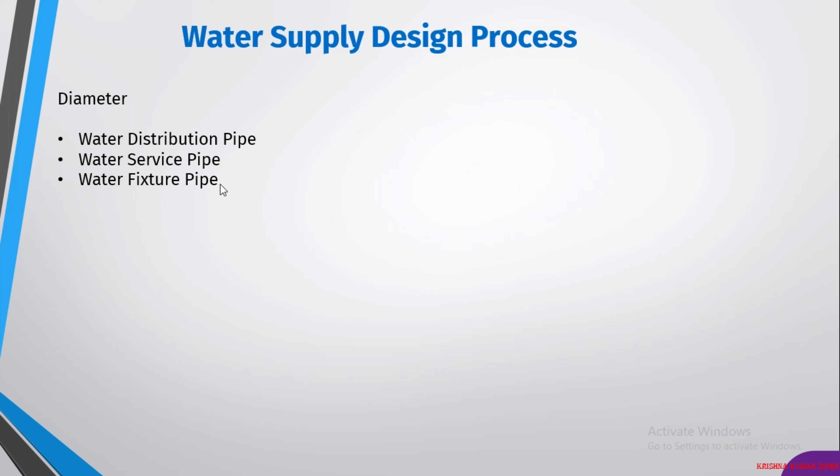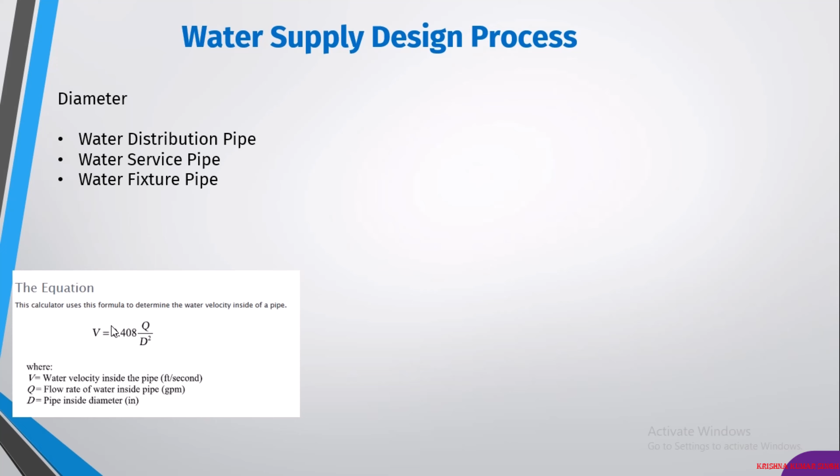Let's look over here. Our purpose is to design the plumbing system by calculating the pipe size or diameter. To find the pipe size, you already know from this equation that you require Q and velocity. The input for calculating the pipe size has two inputs: number one is water demand, also called Q, with units in GPM, and number two is velocity.

Now the second question is how you calculate water demand. You can calculate water demand by measuring the water supply fixture units. You cannot calculate GPM directly, or take the values of GPM from the International Plumbing Code. First, you must know the water supply fixture units of the entire building, then you can convert water supply fixture units into water demand or GPM. So this is the first method for measuring your first input.

Now for velocity, you must consult ASPE handbooks, American Society of Plumbing Engineers handbooks. The handbooks provide you the values for the velocities. If you use copper pipe, the velocity value is different. If you want to use plastic pipe, PPR pipe, then the velocity values are different. You can get these values from these handbooks, and normally these velocity values represent good engineering practice.

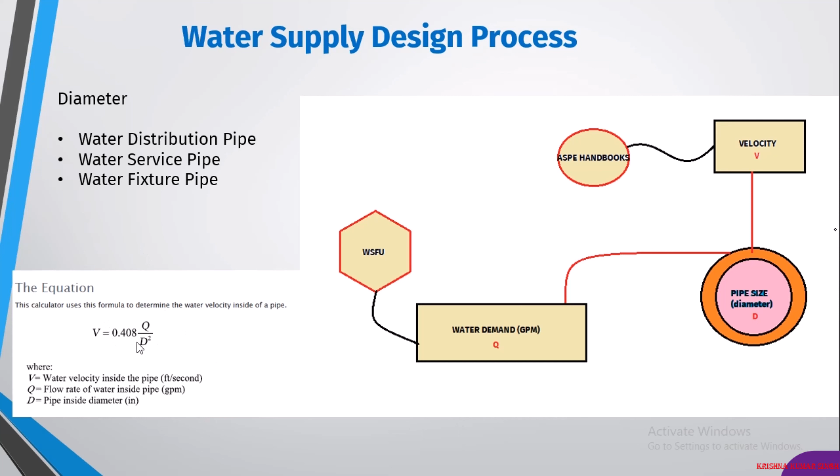Now let's discuss estimating water demand, or in other words, estimating the GPMs - how much gallons per minute are required for a residential house, a villa, or a high-rise building.

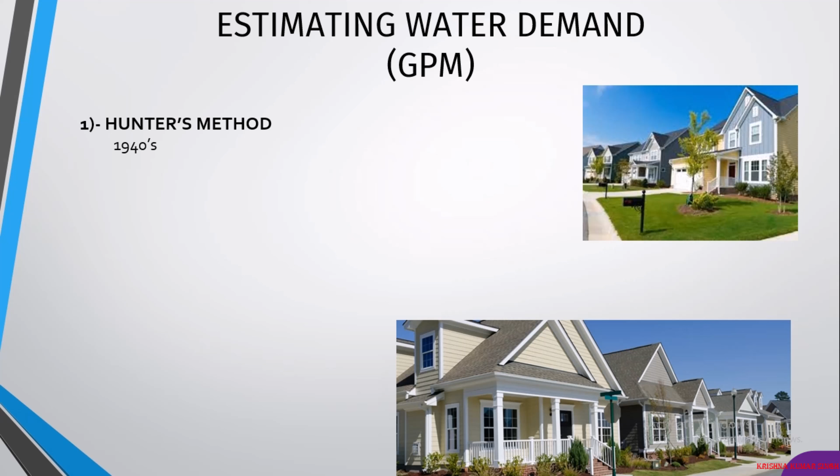To calculate the amount of water required in a building, we have a widely acceptable method called Hunter's method. It was proposed by Dr. Hunter in the 1940s, and is widely used by most companies and adopted by different international standards like International Plumbing Code, Uniform Plumbing Code, and ASHRAE handbooks. There is another method proposed by the American Water Works Association in the early 1970s, but that method is not used by different designers. Most people rely on Hunter's method because it is widely acceptable and adopted by different international standards. So my course focuses on this method.

I will teach you Hunter's method to calculate the water demand, and we follow this method to design our plumbing system.

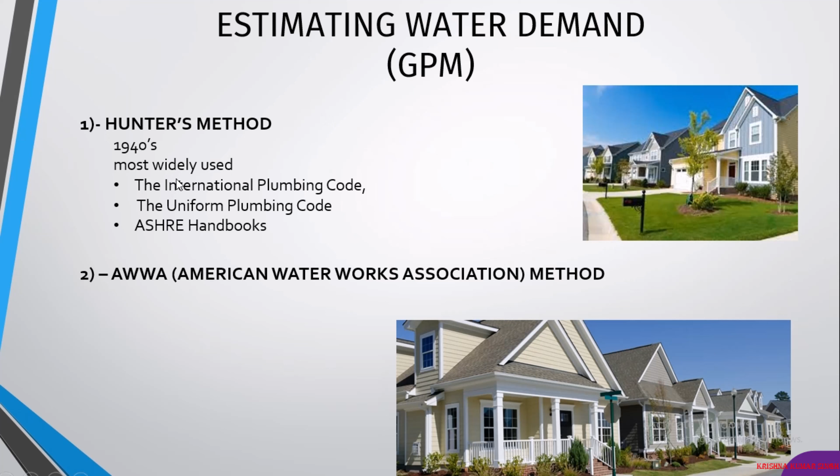So guys, in this video we will estimate the water demand, in easy words, the GPMs of a residential cold water system.

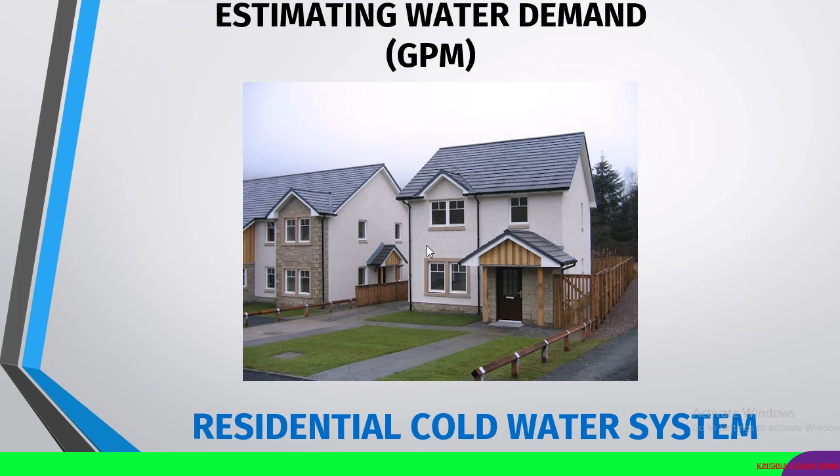Here we have a sample project, or you can say a sample example of a residential house. In this house, we have a ground floor and a first floor.

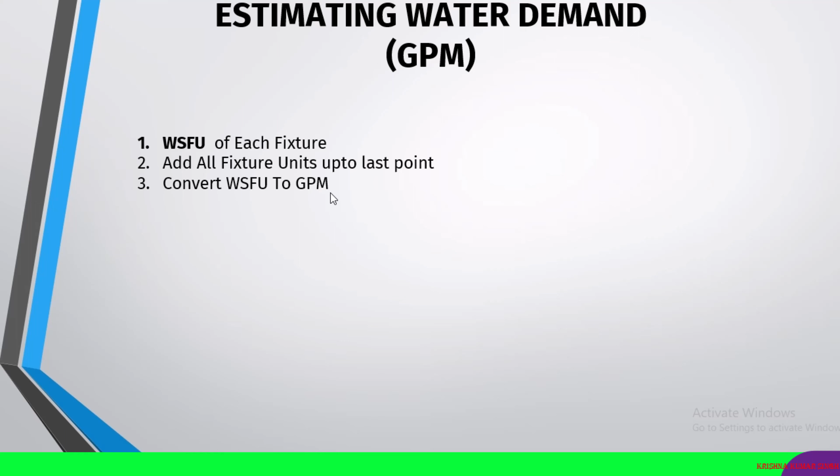The first step is calculation of water supply fixture unit. We will add all the water supply fixture units. After addition, we will convert the WSFU to GPM. In the upcoming video, I will elaborate on this to avoid further confusion, and we will solve and calculate the diameter of these pipes. Alright, see you in the next video.

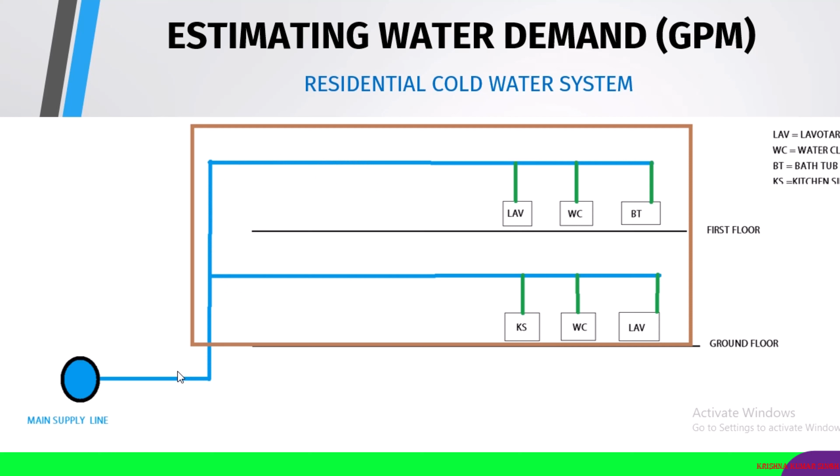Now let's discuss water supply fixture units. Prior to sizing a domestic water system and determining pipe sizes, it is important to understand the concept of fixture units.

Water supply fixture units, WSFU, is the standard method for estimating water demand for a building or residential facility. This system assigns an arbitrary value called WSFU to each fixture, whether it's a water closet, lavatory, kitchen sink, or any plumbing fixture. We assign a value to each fixture based on the amount of water required and the frequency of use.

Let's learn with the help of an example. A WSFU of a water closet in a private project, like a residential house, has a value of 2.2. These values are taken from IPC, International Plumbing Code - I will show you the table from where I got this value. A water closet is assigned a WSFU of 2.2, while a sink or lavatory is assigned 0.7 fixture units, FU. These values are based on the International Plumbing Code.

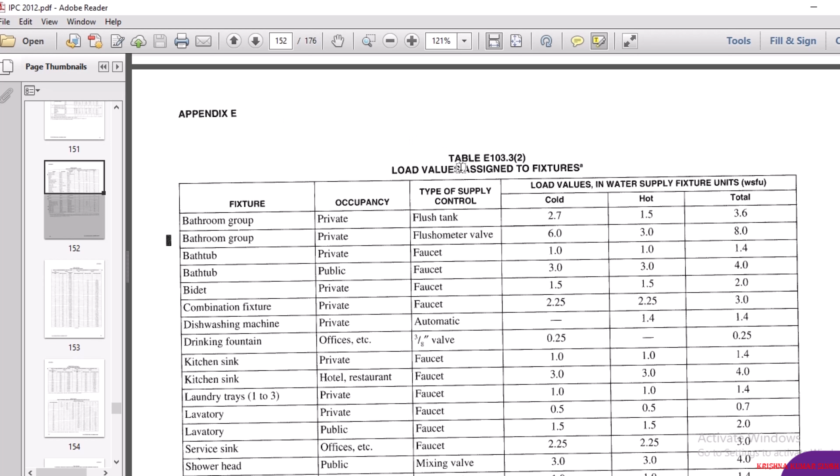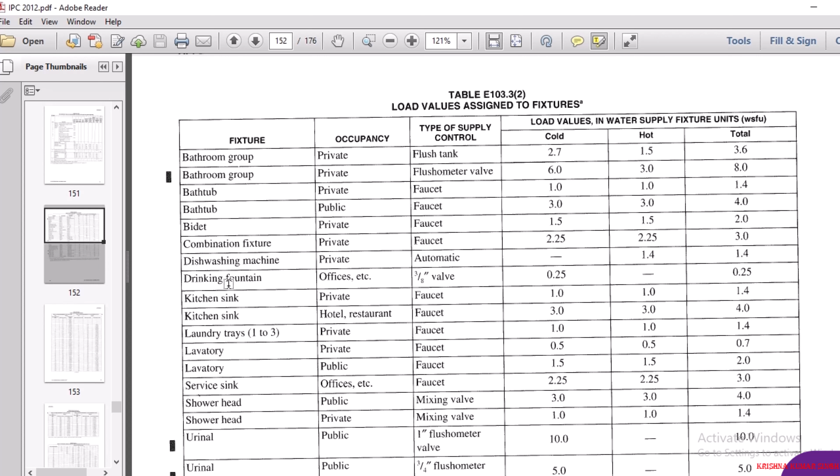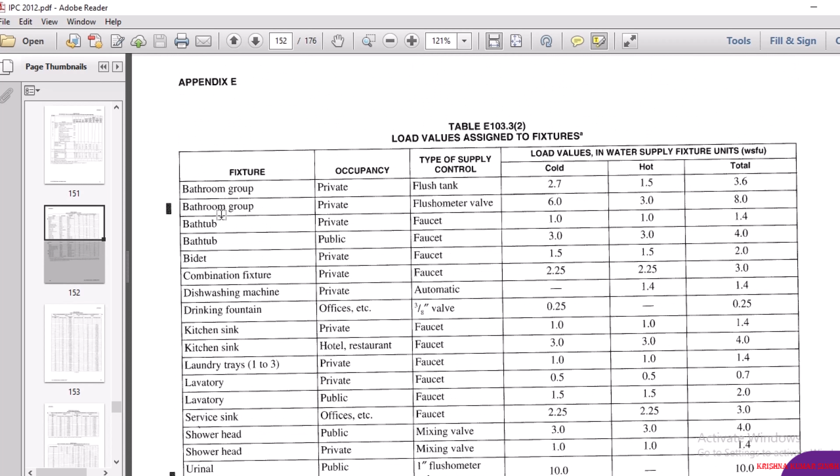Let me show you: page number 152, Appendix E, table number E103.3(2). In this table, there is a list of fixtures required in a plumbing system: bathroom group, bathtub, bidet, kitchen sink, drinking fountain, urinals, washing machines (three types), water closets, public and private. We further classify the occupancy into two categories: private, office, or public.

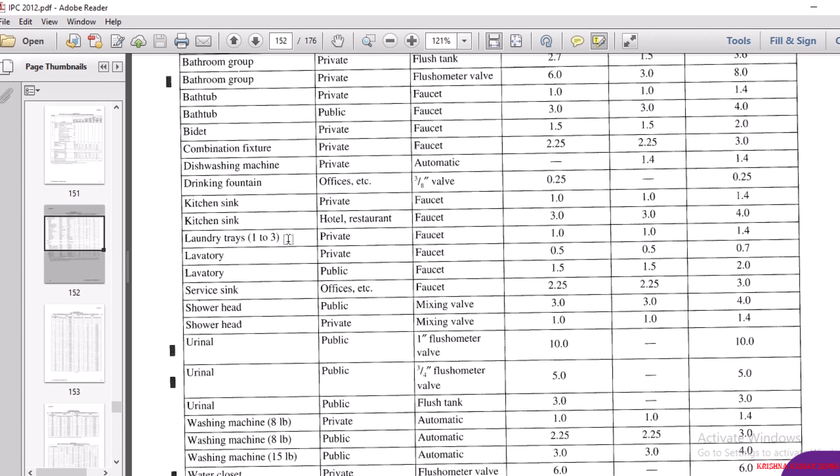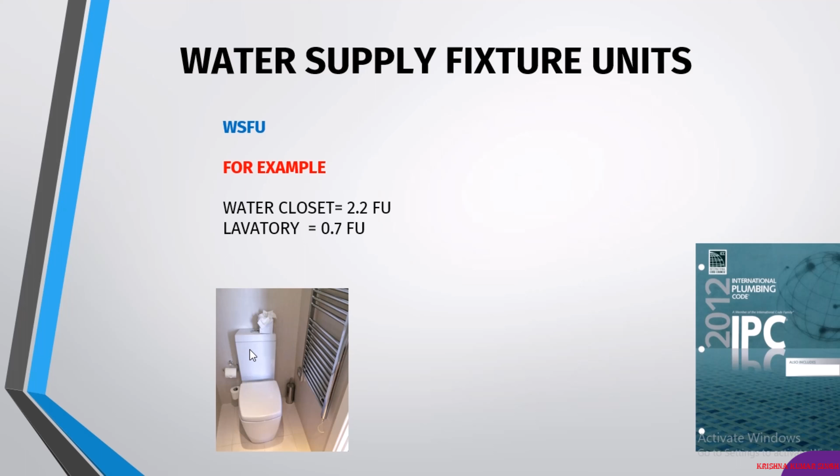So in our example, we have taken water closet 2.2. This is water closet, private. In private, we have two options: flushometer valve or flush tank. It means there is a simple water closet with a flush tank, 2.2 value. Normally in our residential houses we use tank type water closet.

I will tell you the difference between the water closet with flush tank and flushometer valve in the next video, but just in this video focus on the data extraction from this table. So the water closet with private flush tank value is 2.2 here. Cold water value is 2.2. Everybody knows the water closet only requires cold water in most cases. We don't require hot water unless you live in a very cold area.

So the lavatory is 0.7 fixture unit. How do we get this? This is the lavatory, public or private. We are dealing with private. It means this is lavatory, private, 0.5 fixture units. Water supply fixture unit, WSFU 0.5, and 0.5 hot water. So in this case, let's suppose my client does not want to install hot water facility. So I'm only interested in calculating the cold water value 0.5. So this is how you will get the values of WSFU.

Don't get confused. I will solve the sample project that I already showed you in my previous video. I'm just telling you how to get the values of fixture units.

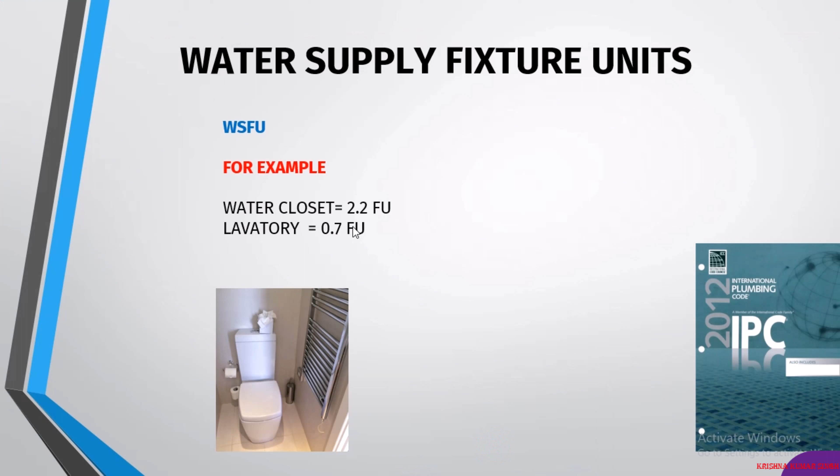Now coming back, 0.7 fixture unit. So the difference in fixture unit is basically due to the fact that a toilet requires more water than a sink, right? This requires more water than a sink. So therefore it has a higher fixture unit value.

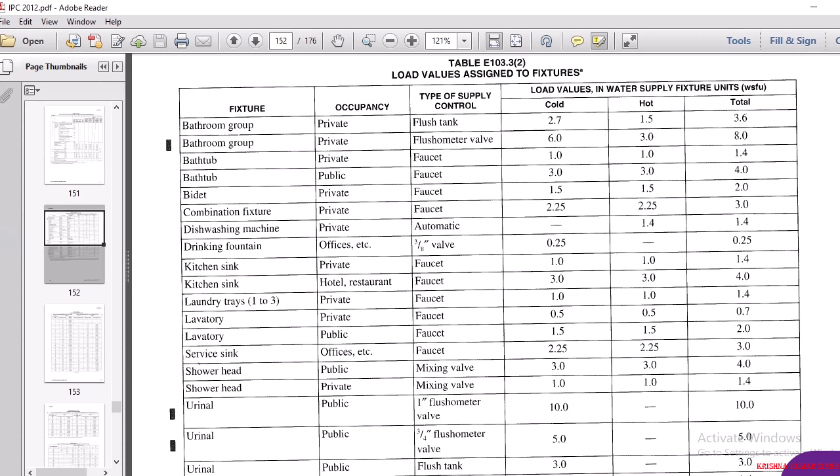Now let's have another example. We have a public water closet. That was residential. Let's suppose we have an airport or a shopping mall and we have installed a water closet, tank type water closet. In this case, we have 5.0 fixture value. Let me show you with the help of water closet, public flush tank 5.0.

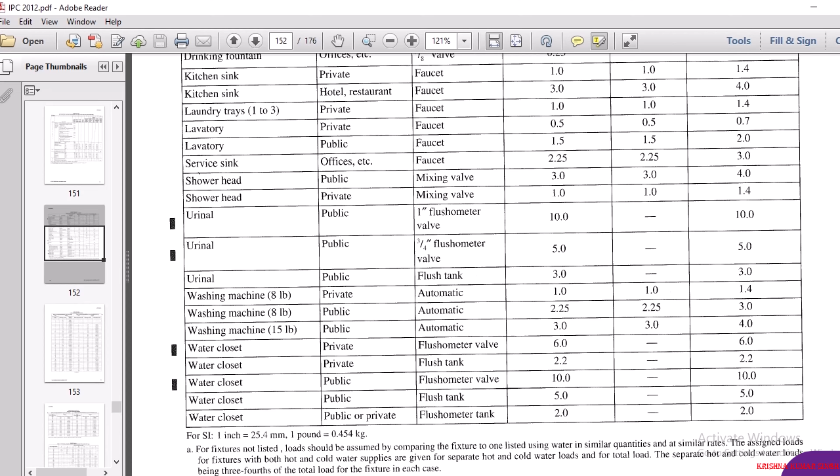So why is there a difference in fixture unit value? It has the same tank, everything is the same. A public water closet has water supply fixture unit value of 5.0, even though the water closet is the same as the private water closet and the same amount of water is required. So we can say that a public water closet has a higher usage frequency, which increases the WSFU value.

Okay, so that was a brief introduction about water supply fixture unit. We will use this study during our design. So in the next video I will teach you about the difference between flushometer valve and flush tank, and then we proceed with the sample example that I already showed you in my previous video.

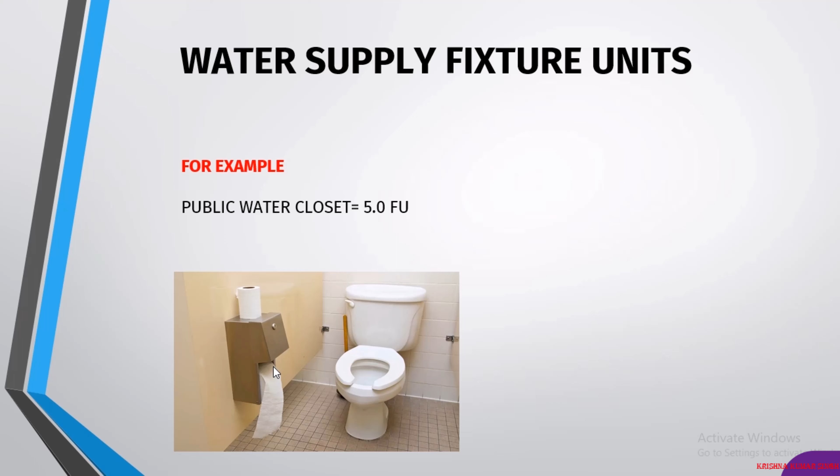So now we will study about flush tank versus flush valve water closets. Let's discuss the flush tank water closet. A tank type water closet normally uses the tank fluid elevation to forcefully flush the water closet waste through the waste system, and after the tank is flushed, it uses a fill line to refill the flush tank.

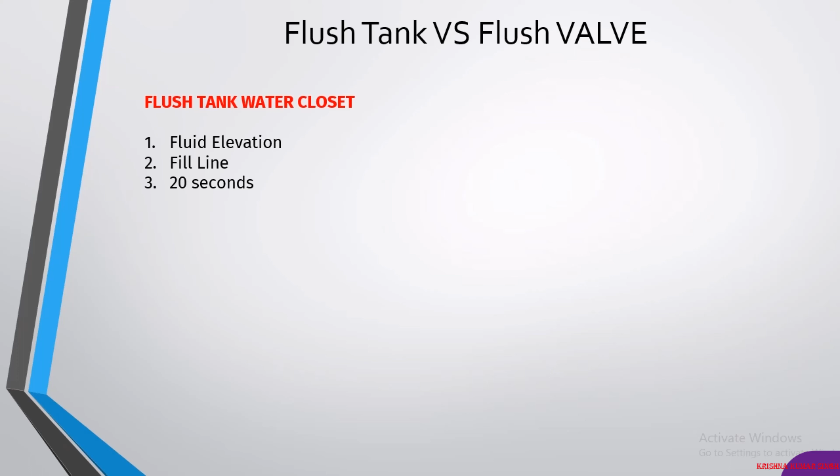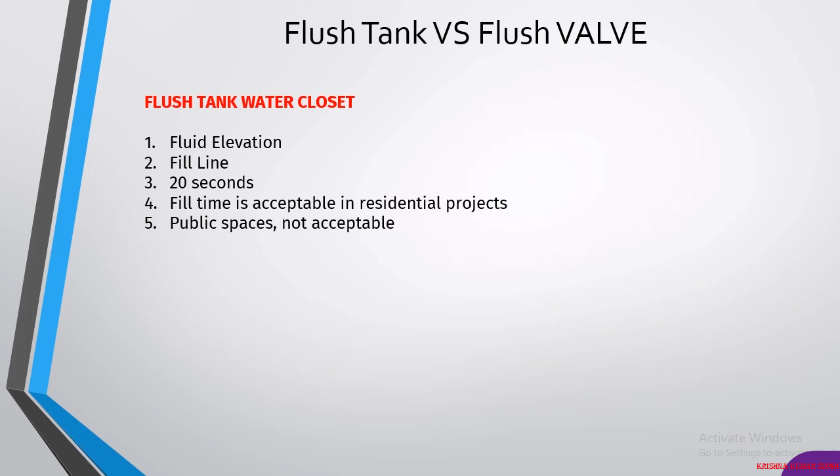And the fill time is approximately 20 seconds. At a residence or residential facility, a small home, this fill time is acceptable. But in public spaces, it is not acceptable because the frequency of use is more in public areas. This is a schematic diagram of a flush tank water closet for better understanding.

Now, if you look at the flush valve water closet, we have this image. This is without a tank, and a flush lever over here. When you push this lever, high pressure fluid or water will come through this pipe and remove the human waste from this toilet or water closet. This type of flush valve water closet is usually used in public spaces like airports, shopping malls, etc., and it has high pressure.

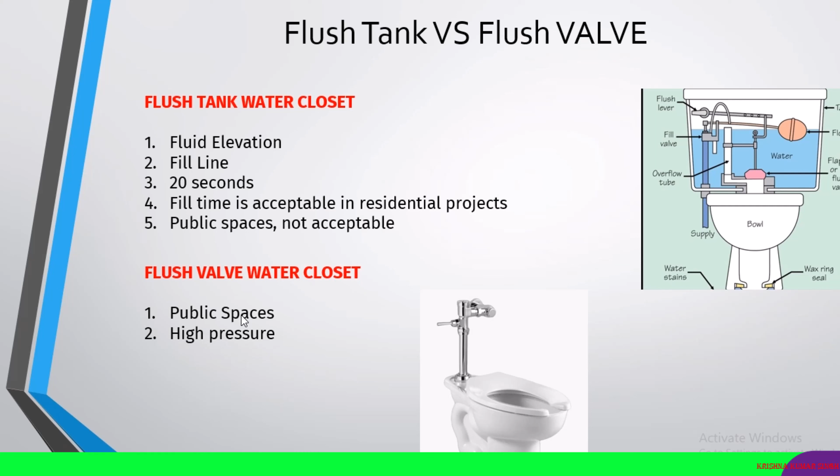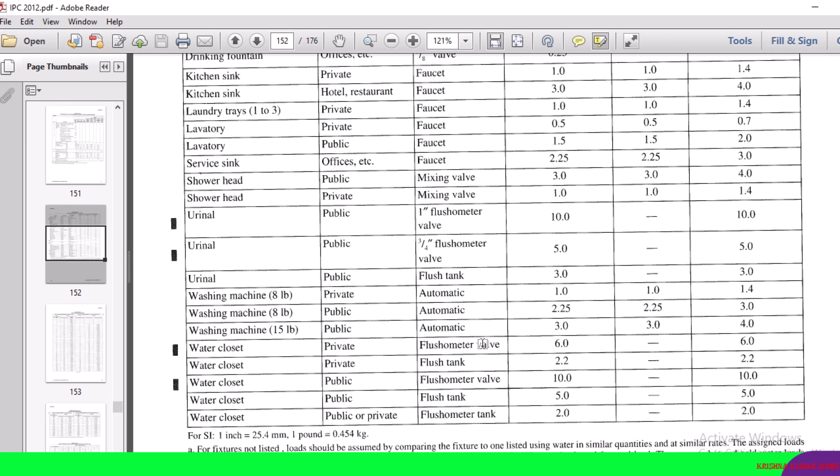So now go back to this load value fixture table. Water closet, we have water closet public, flushometer valve 10, flushometer valve 6. So there is the difference between—I already taught you the difference between tank and flushometer valve. Flushometer valve and flush valve are the same.